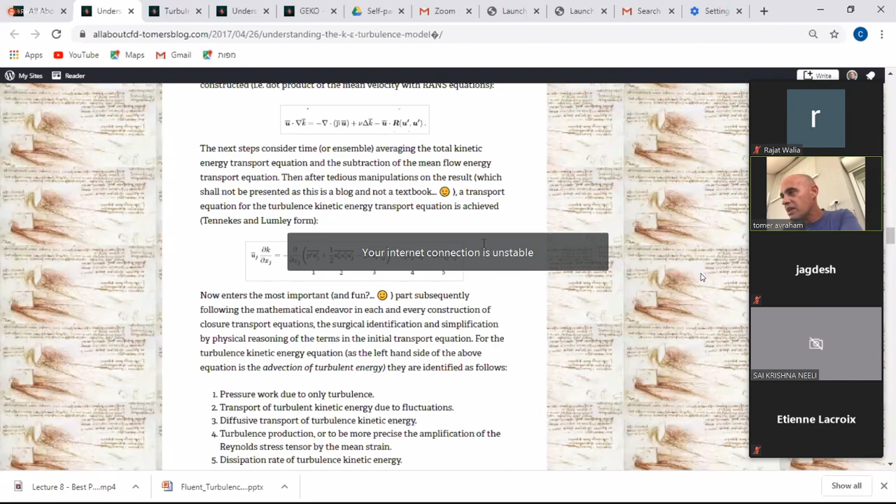Okay, so now I'm going to go back to All About CFD and under the objects that you saw there. Here is the triple correlation.

Each of them has a job. One of them is pressure due only to turbulence. One of them is the transport of turbulent energy due to fluctuations, the diffusive transport of kinetic energy. This is an exact equation.

By this point, we haven't made any ad hoc assumption, but now we're going to make some. The ad hoc assumptions are such that we're going to have an equation in the end which doesn't have in it any perturbative velocity.

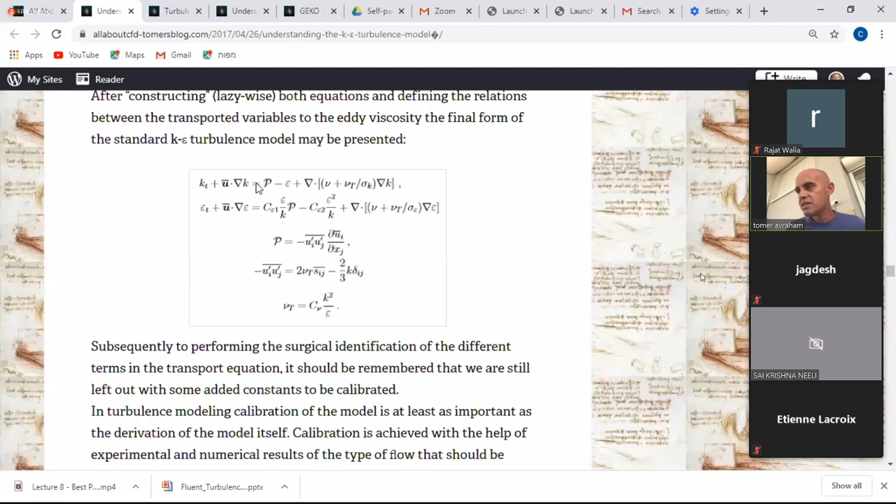So these ad hoc assumptions are kind of an issue. I mean, we already model all the turbulence. And not only that, we don't even solve the exact equations of the modeled equations.

But lucky for us, RANS has proven itself very good for flows which are binding to the law of the wall, which we're going to see again in a few minutes.

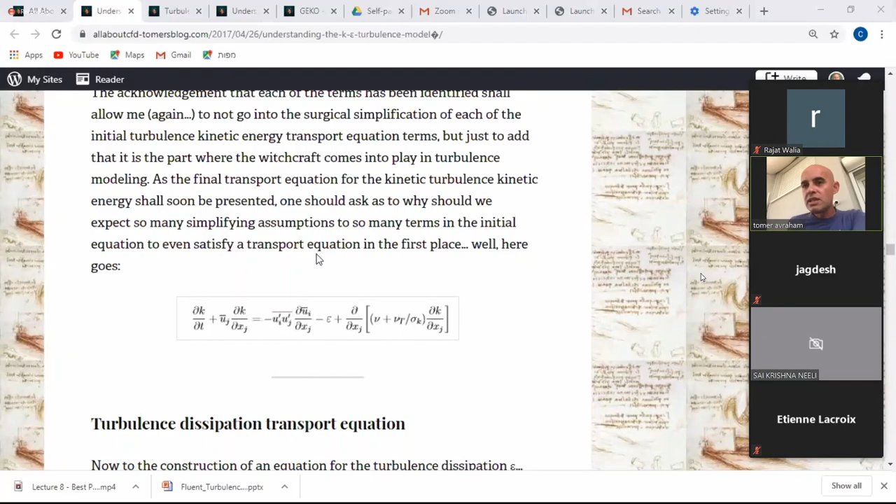And then there's the epsilon equation. Now, we can derive the epsilon equation the same way we derive the K equation, the turbulent kinetic energy equation, but it's quite cumbersome. So what we do, and it's an issue.

It's an issue, it's not like it's something we need to say doesn't matter—it does matter. We do an analogy. We take a production term, a destruction term, a diffusion term, and we handle the fact that we don't know epsilon by combining some connection with these constants here that you see.

These constants are empirical, that we're going to get from experiments, from DNS maybe. So we have an analogous equation which looks like the ad hoc equation for the kinetic energy, but for epsilon. We can do the same for omega, and for any length scale that we want to add.

I mean, the kinetic energy is like a feature of the velocity, and we need a length scale, and then the equations are closed because we can derive an eddy viscosity and solve at least for the average flow in the Navier-Stokes equation.

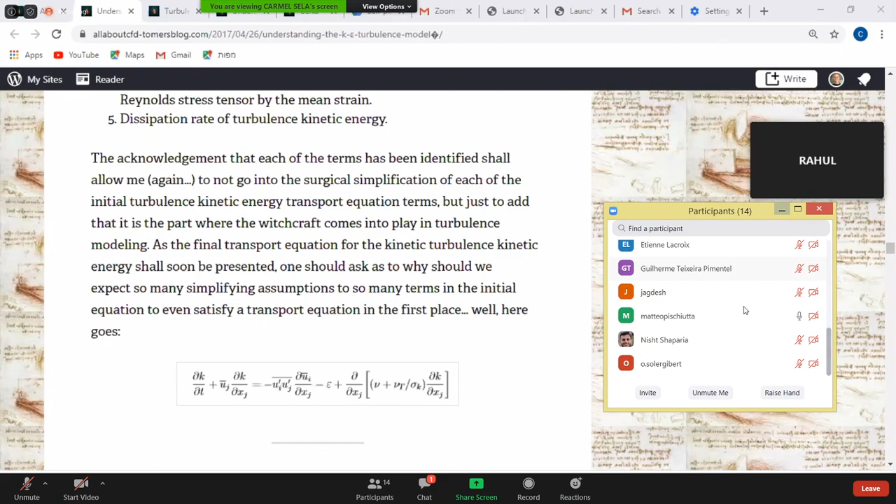Okay, so what you see here is the standard K-epsilon model. You don't see the correlation.

All these constants are not to be played with. You open Fluent and you see these constants, you can touch them, but then the K-epsilon or K-omega or whatever equations aren't going to follow the law of the wall, and frankly, they won't be calibrated, and you're going to get nonsense.

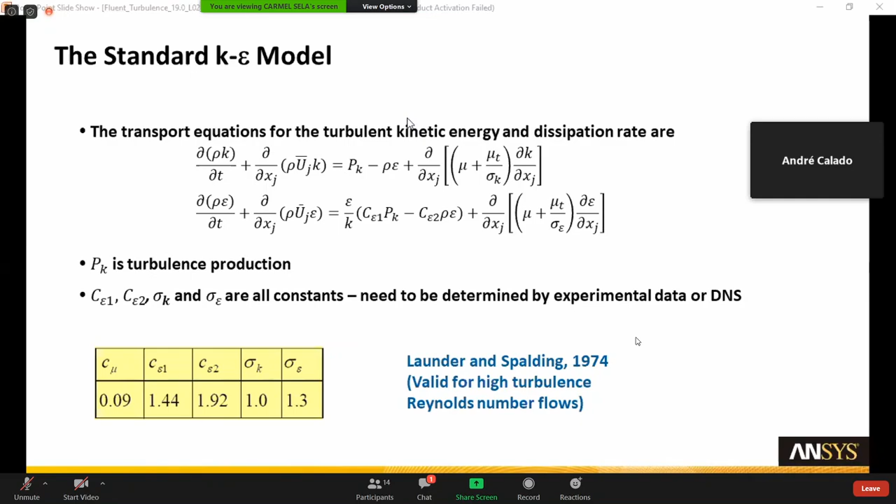Now we're turning into a little bit of history about K-omega. The original K-omega, let me share the screen again. Pause, share the screen, yeah, yeah.

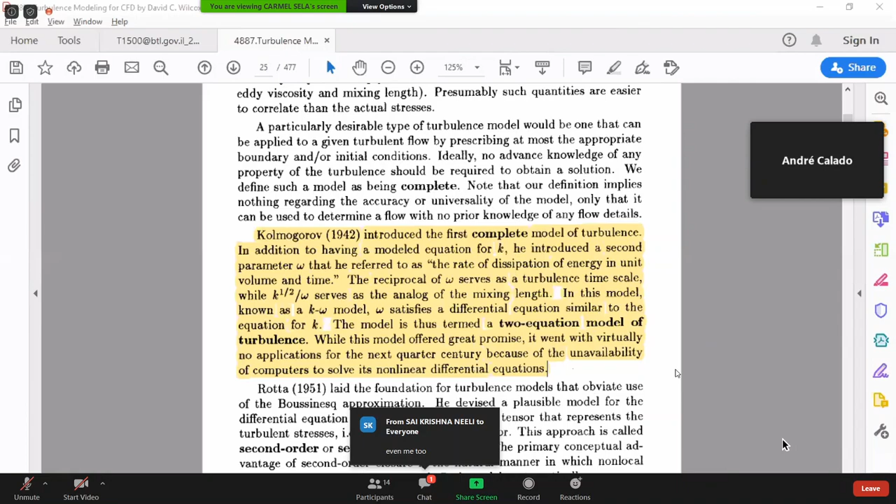The original and first K-omega was introduced in 1942, and it is the first complete model for turbulence. You probably understand what 'complete' means. Complete means we have the length scale and we have a velocity scale. We can produce it.

One second. Yes, actually we are hearing a big sound. Can you check that one? Hearing the big things. I'm not sure it's for me. Yeah, still hearing that. It's not from my room.

Okay, let's mute everybody. Sit down. Yeah, now it's fine. Lady? Why did... sit down, sit down, sit down, sit down, sit down, sit, lady, sit. Okay, sit down, sit down. Yeah, now that beeping sound was gone.

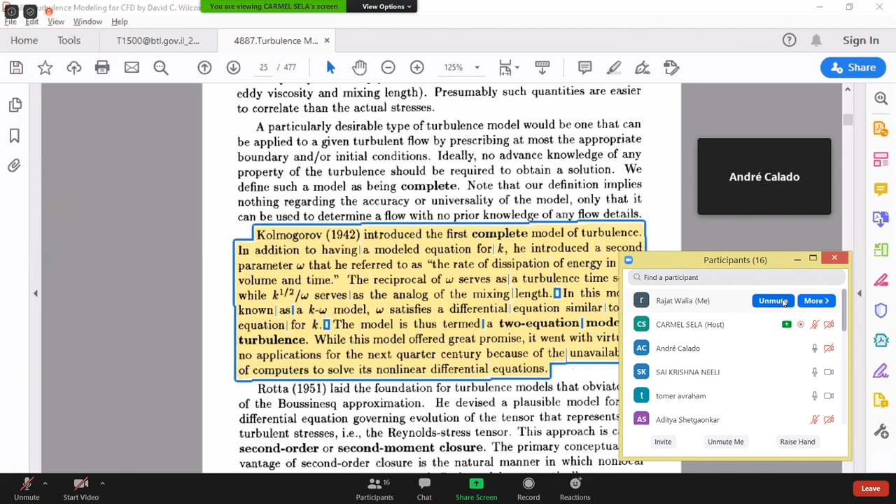Beeping is back. Yes, so someone is beeping. I'm muted. Now again, it's okay, yeah it's okay. Whom do you have muted? Someone has an alarm clock. Maybe probably they wanted it to wake them up for... but couldn't. Okay, so let's continue, and let's continue fiercely.

So the first complete model - by complete I mean it has two equations. We have zero equation models, we have one equation models which is more for kinetic energy. We have special one equation models like Spalart-Allmaras, which is a one equation model but it's a closed one, a complete one, because it has the transport equation for the eddy viscosity. And then there are the most useful ones: Spalart-Allmaras is mostly for aerodynamic flows, and the K-epsilon, the K-omega, and all the rest of them.

The first one was introduced by Kolmogorov, and it's quite amazing - he did most of his work really disconnected from the West. The model was a model as a model should be, as I would write it on paper, but it wasn't codable. It had never been tested, and it wouldn't have worked. There was no way to solve such nonlinearities at that time.

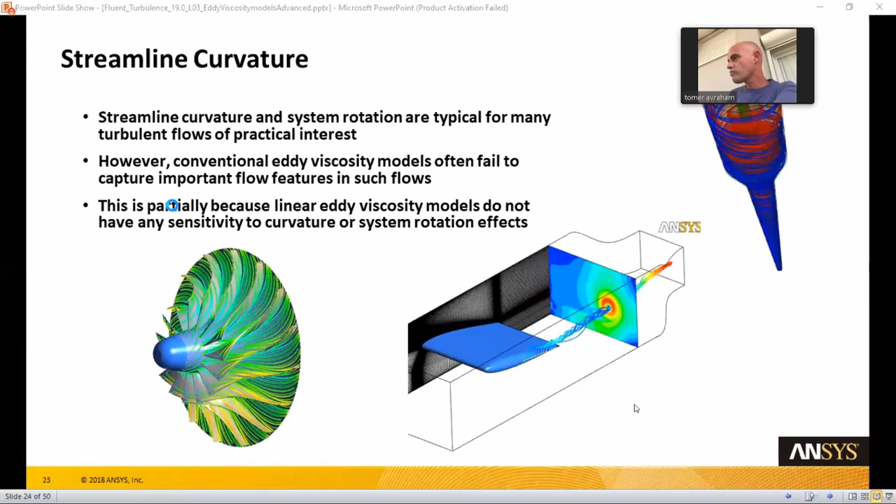Now we're going to go to the slide share. Share. Okay. Let's start talking about...

K-omega models. What we're going to talk about today is advanced two equation models. I told you about the history of K-omega - it started with Kolmogorov, beginning of the 40s. Just imagine that Launder and Jones had their model in 1974. The K-epsilon had come even before, from Spalding.

So in about 1982, David Wilcox derived K-omega. The K-epsilon had some obvious problems, most of them related to the inability to integrate through the viscous sublayer - it's wall sensitive, and this caused a lot of problems. So Wilcox devised a model which actually avoids the problem of wall sensitivity.

And you can derive the omega model exactly like you derive the epsilon model - derive the turbulent kinetic energy equation, then use an analogy and some constants that you afterwards check by experiments or DNS, and derive an equation for omega. That's the Wilcox model.

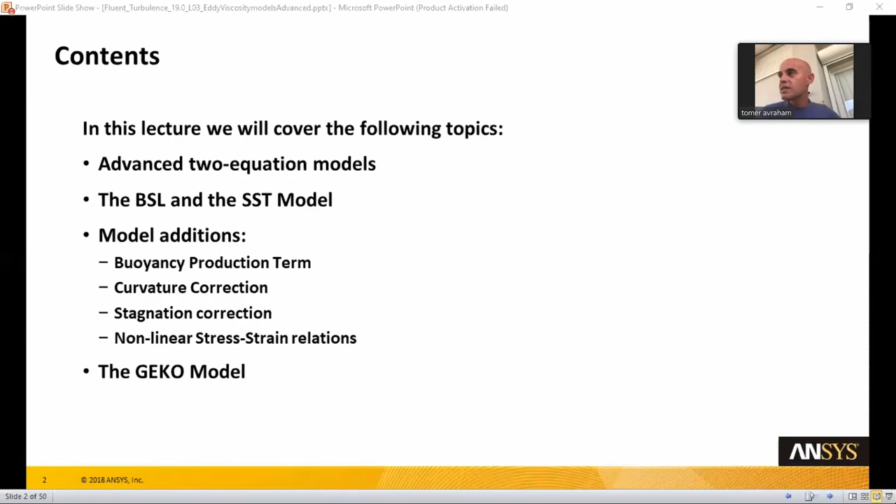So while at NASA Ames, he devised a model called the baseline model, and it was purely based on engineering thought. Why don't we combine the two models, the K-epsilon near the wall and the K-omega away from the wall? But actually the other way around: the K-omega near the wall, where there's no sensitivity, and the K-epsilon away from the wall.

You can see here the K-epsilon is very stiff near the wall. You can't integrate the epsilon equation to the viscous sublayer. So you either have to use wall functions, or as we'll discuss in near wall treatment, you'll see how problematic it is. Or you have to use a low Reynolds model, which means very nonlinear damping functions and problems with convergence.

On the other hand, the K-omega of Wilcox is very good at the wall. It even has what's called an elliptic nature - it communicates with the wall. In the logarithmic layer, both models are pretty accurate. And in the wake region, there's the free stream problem of omega's sensitivity to inlet conditions.

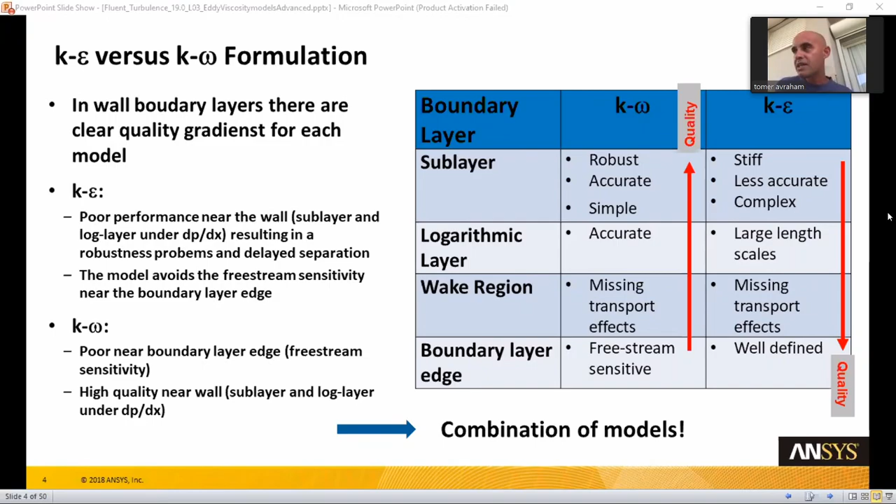So Menter said, why don't we combine the two? Of course it can't be a combination that's sharply defined, and we don't want to solve two equations, one for K-epsilon and one for K-omega. So what we do is use the Wilcox K-omega near the wall and a K-epsilon model which is transformed into a K-omega model away from the wall.

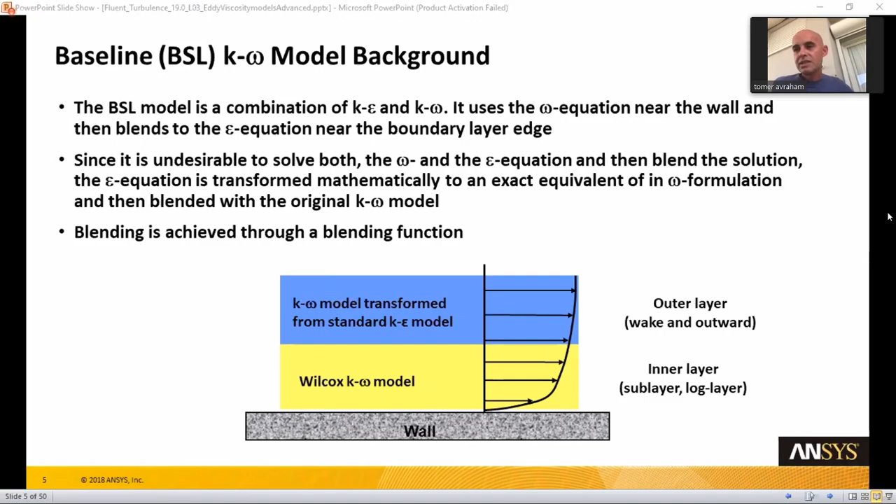So the K-omega, as I said, as we can derive it like we derive the epsilon equation, is the Wilcox equation. When we take the epsilon - there's a connection between omega and epsilon.

Do you see these messages that I get? Or no?

Many messages. Okay, there's a connection between omega and epsilon. You can easily derive an equation for epsilon by means of omega, and you get an additional term. What's so wonderful about this additional term? Near the wall it has almost no effect - it's actually a cross diffusion term. But near the edge of the boundary layer, it prevents the arbitrary conditions that the omega equation gets from the inlet. So problem solved - problem almost solved.

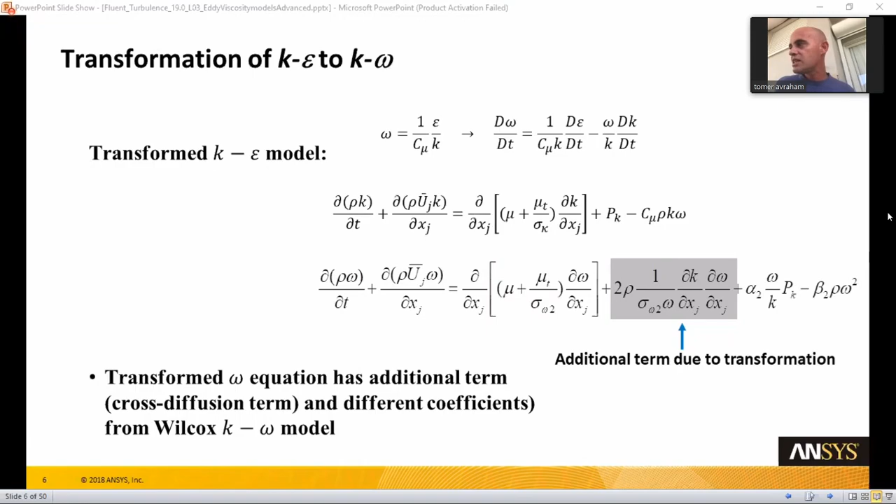The thing is, the blending has to happen so that now we have one equation - the equation is for K-omega. And we have something that Menter does a lot, which he will do again in the SST model, the transition model, and every model he has: using blending functions to blend between the two and arrive at a model which is the baseline K-omega model.

So most of you would say yes, the shear stress transport is K-epsilon away from the wall and K-omega near the wall. No - that's the BSL model. So we have a new BSL model, and the constants are a little bit different. We have a little disadvantage.

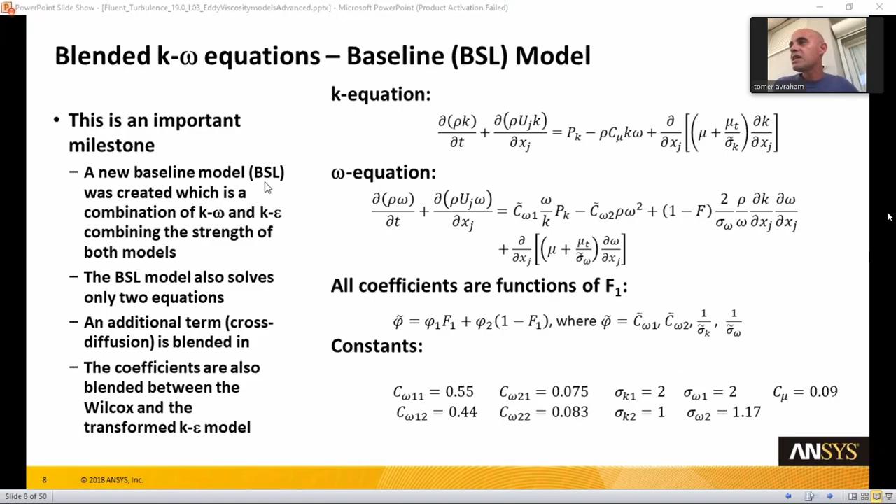Now we have the F1, which requires additional calculations. It's a linear calculation, but it's still a little bit slower than solving something like a realizable K-epsilon. But with modern computers, most practical problems don't feel these kinds of issues. So that's the additional thing.

The blending function itself is always very sophisticated and always has something secret in it. But you could probably say that the switch happens in the logarithmic layer, mainly in the middle of the boundary layer.

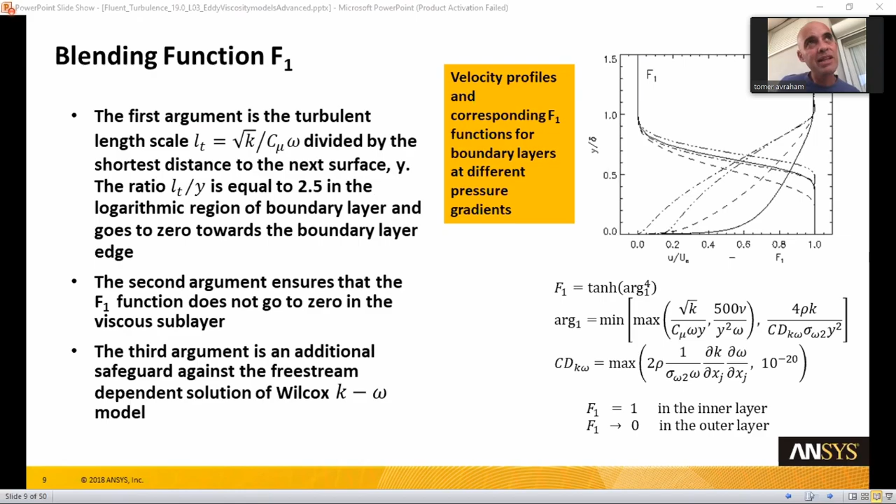Okay, now the shear stress transport - what is it? What we've noticed, in honor of Bradshaw's observation, is that the shear stress in the boundary layer is proportional to the kinetic energy. Turbulence implied by standard two-equation models looks quite the same - actually exactly the same, but multiplied by the square root of the ratio of production of kinetic energy to its dissipation.

Usually for equilibrium flows this ratio is 1. But near separation, for non-equilibrium flows which is an issue, or in cases which was a problem of the K-epsilon, it used to predict delayed separation. We saw that this value of production to dissipation could be very, very high. So what we did was put a limiter on the value, which is 10.

You can send... and we clip it, and then essentially we have a model which produces the effect of no delayed separation - which was a problem with the K-epsilon and is still a problem with the BSL.

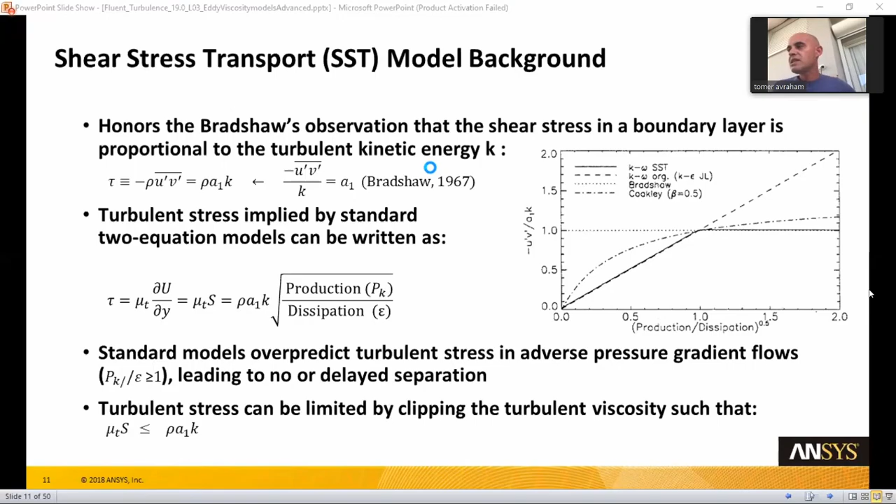But in non-equilibrium flows, the production could be very big, especially near stagnation points or separation points where the shear stress goes to zero, and then problem comes.

Limiter for the mu-t, that's less interesting here.

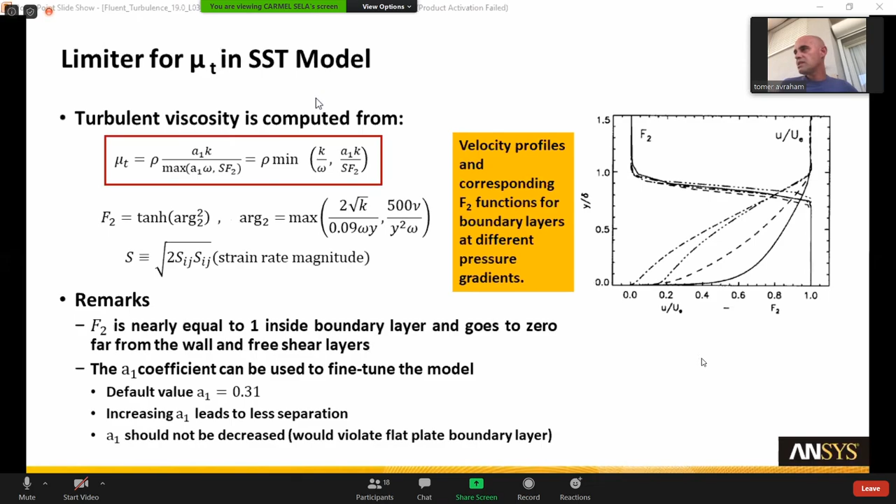The diffuser example shows how the K-epsilon model doesn't predict separation at all, while the SST model predicts separation. That's a kind of validation example—it's a fix to prove the point. But again, you should consider it carefully.

I'll say a few words about when to choose models like the K-epsilon realizable, and not just make the K-omega SST your default, although the ANSYS family makes sure that you do.

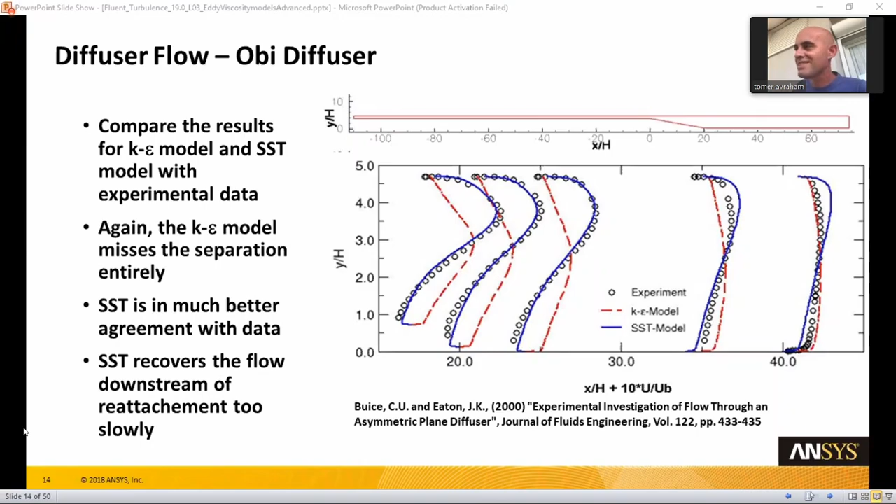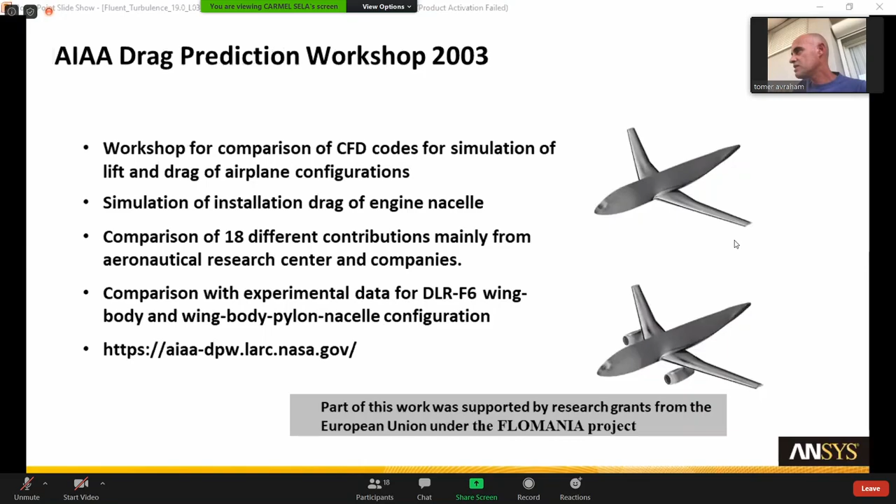So there are a little bit of examples here, some nice examples. Model additions, buoyancy term—for cases where buoyancy is really, really important.

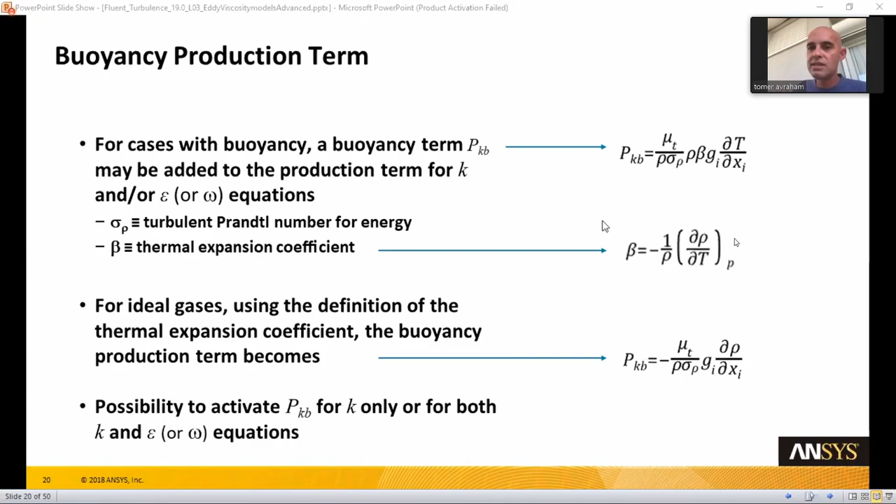Those of you who deal with it—is there anyone here who deals with highly buoyant flows? Then you should consider it. Do you have a remark about the subject? You can unmute yourself and ask.

Yeah, hi. I'm looking for fire simulation in subway stations, actually. So that's why the buoyancy term is quite important to get the correct smoke flow in the subway station.

And it's an interesting problem—my friend, my co-author at All About CFD, that's what he's dealing with. I don't know if you heard about him, but I still use Fluent, while the community more often uses FDS. He used FDS and LES. Yeah, I know, but for myself I still use Fluent. That's cool.

So I don't have much to say about it. I mean, probably you need to use it when you use it, right?

I use the full buoyancy effect from the K-epsilon, for all the terms. So here exactly is the full buoyancy effect—you can see it in Fluent.

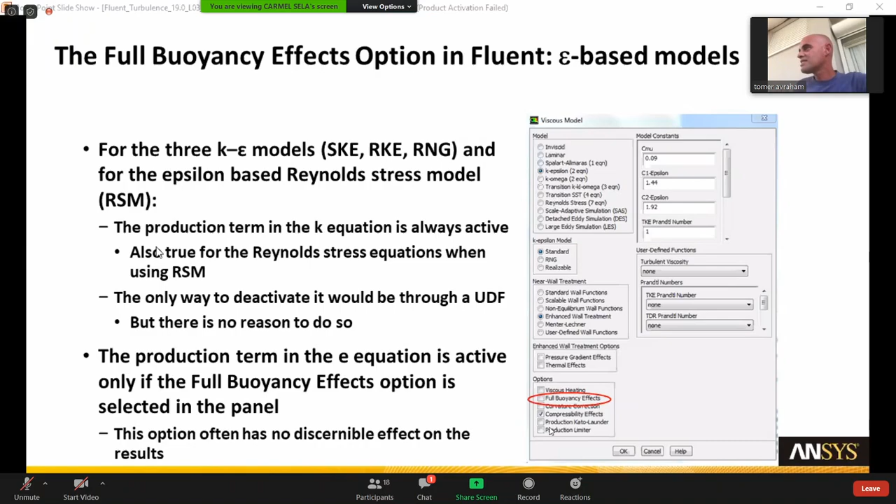Buoyancy effect for omega—you can also use this, but you said you use K-epsilon for solving such problems. Yeah, I still use the K-epsilon.

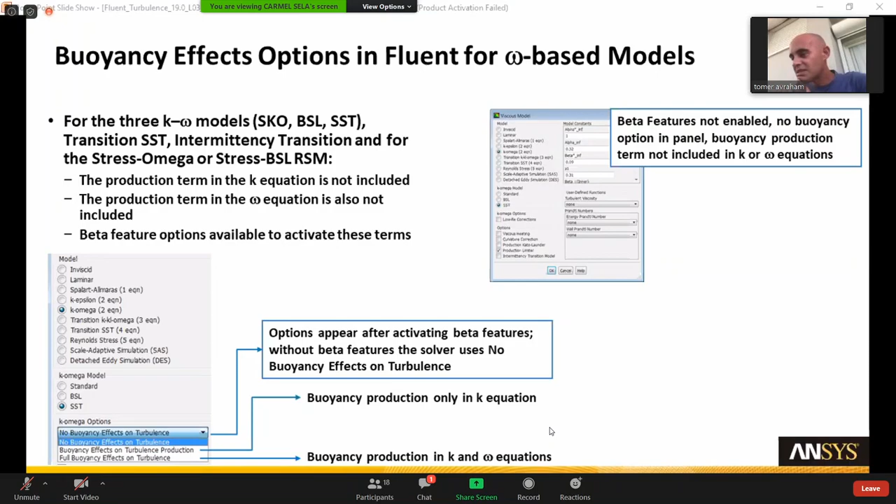A much more familiar problem that many have to confront is streamline curvature—the curvature correction. The results of a U-bend with or without the curvature correction are extremely different. Just to show you what it is based on.

What is it based on? I should share screen again. The correction is taken exactly from the Spalart-Allmaras model rotation correction, the Spalart-Shur correction.

If anyone wants to read about it, this model is like a work of art of tailoring a model. What they did is order the flows into two kinds: those with thin layers with weak rotations, and those with homogeneous rotating shear vortex cores with strong rotations, and they handled all of these.

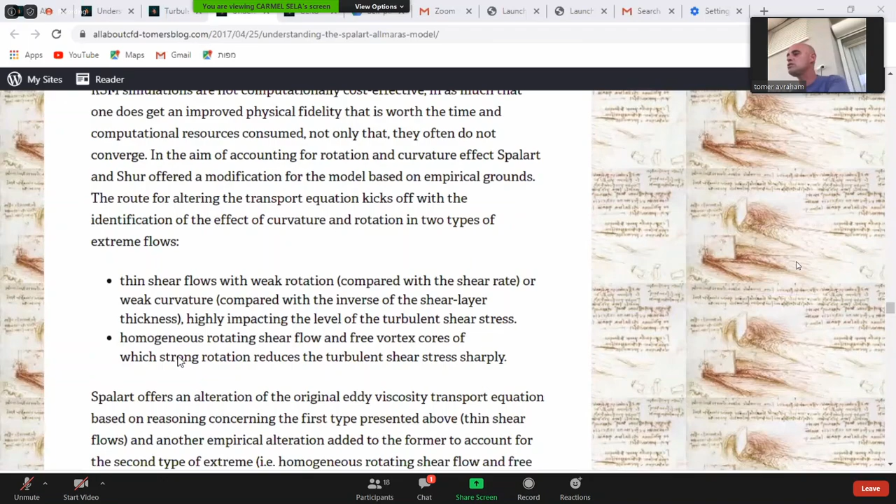Then Mentor just took it and used it for the curvature correction. So it's the same Spalart correction that you already know, but you should use it if you have swirling flow problems—it's going to make a difference.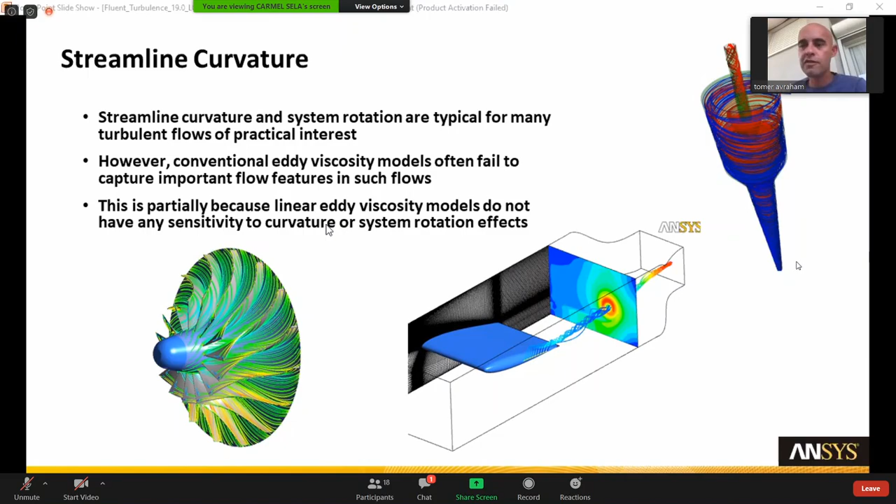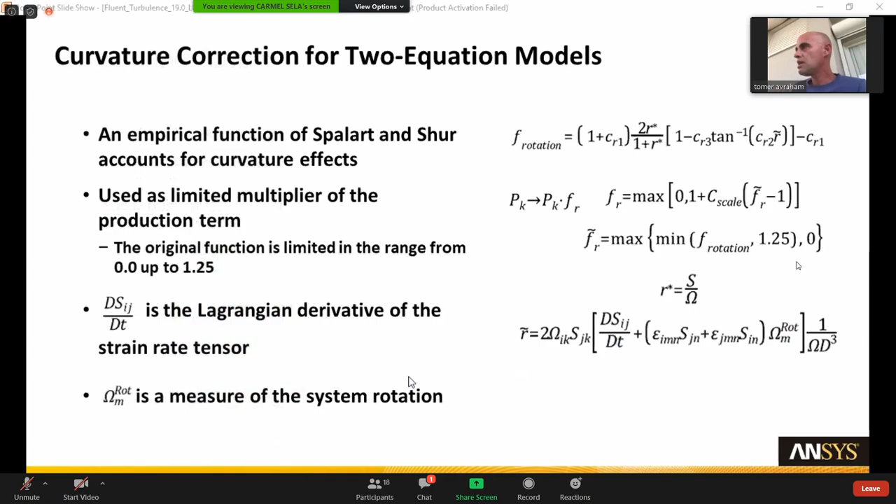Curvature correction for two equation models—we'll take the developed channel flow as an example.

What's really important to me is to talk about stagnation correction. Stagnation corrections are pretty important.

Here is a place where maybe the K-omega SST might not be the best choice. If you have a flow with many stagnation regions which are important—maybe for an incompressible flow problem it impacts all of the domain, but maybe not in such a big way. But if it is important, then there's the Kato-Launder modification.

What the Kato-Launder modification does is use, for the production of kinetic energy, the dynamic eddy viscosity times the shear strain rate S instead. You know what S is—everybody knows what S is, right? That's the shear strain rate; it depends upon the average velocity gradient tensor, half times that.

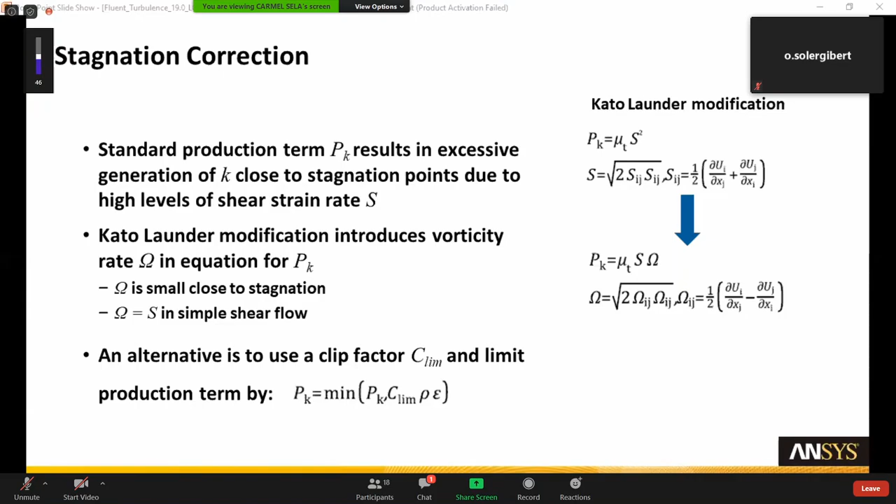Any more questions about the K-omega, K-omega SST, K-omega baseline model? We're not going to touch the transition model, I think it's too much for today.

It's my favorite topic. Sorry, Tomer, I have just one last question. You mentioned that you do not recommend to use the...

SST as Fluent changed it in the new version. I mean, I do recommend using it as a default model most of the time, but that doesn't mean it's all inclusive and does everything better than any other model. I can show you at least 10 problems where the realizable K-epsilon, with different calibration constants, gave better answers.

Or when the BSL gave better answers than the K-omega SST. So it's not... you need to validate your results. You need to check a few turbulence models and see how they react.

There is also the EARSM. If you have corner flows, like a square tube, then you get these vortices where the walls connect, and two equation models can't solve these at all.

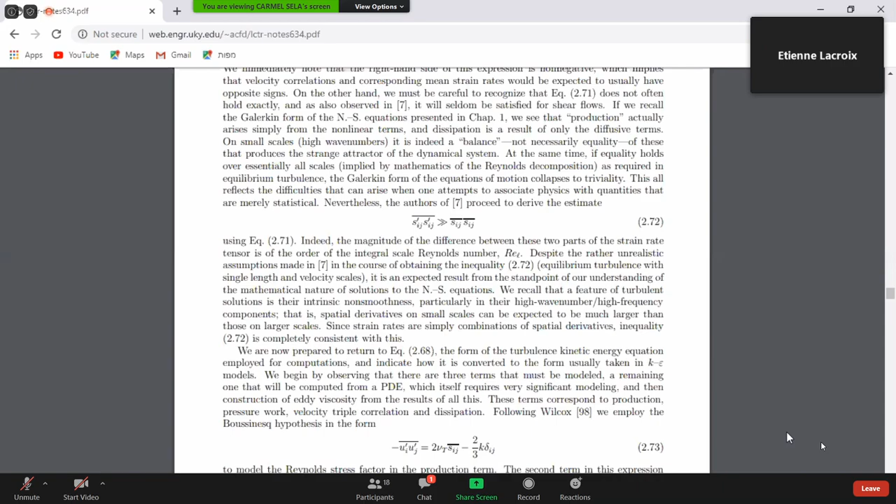Okay, thank you. So that's the other part, the near wall modeling, which I'm sure everybody admits is important.

It's not this page. I lost myself. So, okay.

Near wall modeling. Let's share the screen. So now we're going to go a little bit back to basics, because some of you might be shocked to see the law of the wall in front of you right now. Some of you might not.

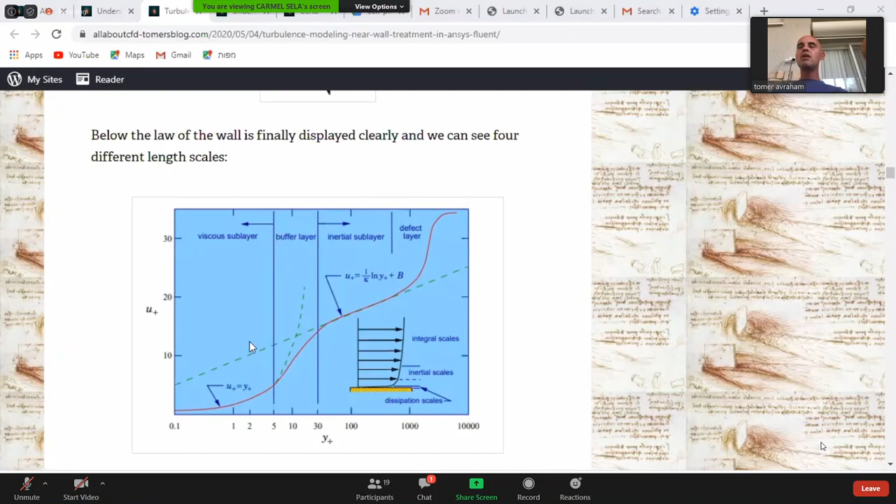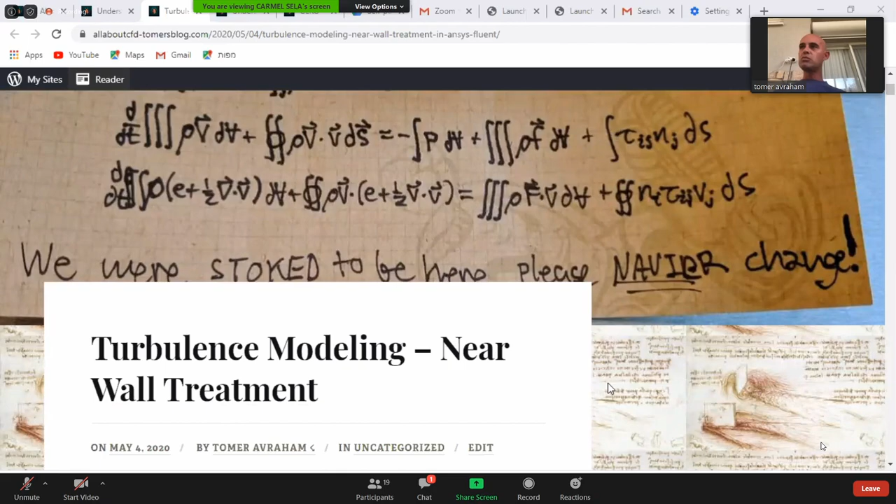If anyone doesn't know the law of the wall, this specific post is the turbulence near wall treatment, and it has a full derivation of the law of the wall, so you can understand what the law of the wall means.

Generally, the turbulent boundary layer separates into a few regions. These regions are not connected directly. You should actually use perturbation theory to find an accurate match. But there's the viscous sublayer, or the laminar sublayer, which is linear.

Remember, we have a logarithmic layer here. These are Y+, they are wall units. This is U+ equals Y+. So till Y+ equals 5, it's the viscous sublayer.

It's kind of a laminar sublayer, and when you use a low Reynolds model, you need to have, or when you want to check for drag or get some heat transfer results which are very, very accurate, you would need to have Y+ 1 anyway. It doesn't matter if you decide to use a low Reynolds model, with its own deficiencies of Van Driest's nonlinear terms and stuff like that, or you use K-omega. You still need the resolution inside Y+ 1, and probably even less, because you want to hit it.

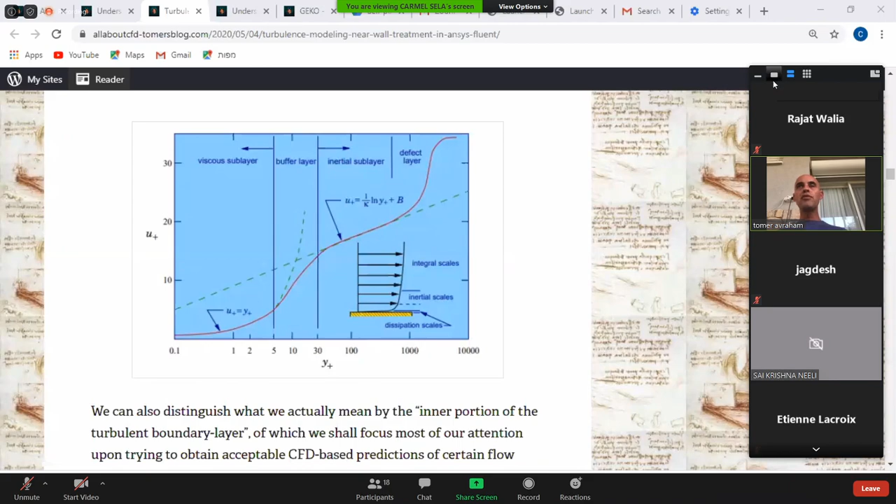So using wall functions is usually when you have a high Reynolds problem, not when you have turbomachinery problems, or... nothing comes up to mind right now. But you should be very careful.

Okay, so you should have the right resolution, which means that the boundary layer should be covered, according to Florian Menter, not me, by at least 15 layers of mesh, prismatic mesh, of course, because we don't want to have numerical dissipation issues. We want the mesh to be aligned with the normal to the prism, right?

That's why we build the inflation layers. 15, and sometimes in problems of aerodynamics, it even gets to 40 or 50.

Remember that for high Reynolds number, the end of the log layer could be about 5,000, 10,000. Low Reynolds number problems like turbomachinery, or other kinds of low Reynolds problems, like non-Newtonian simulation you're doing on blood flow or something like that.

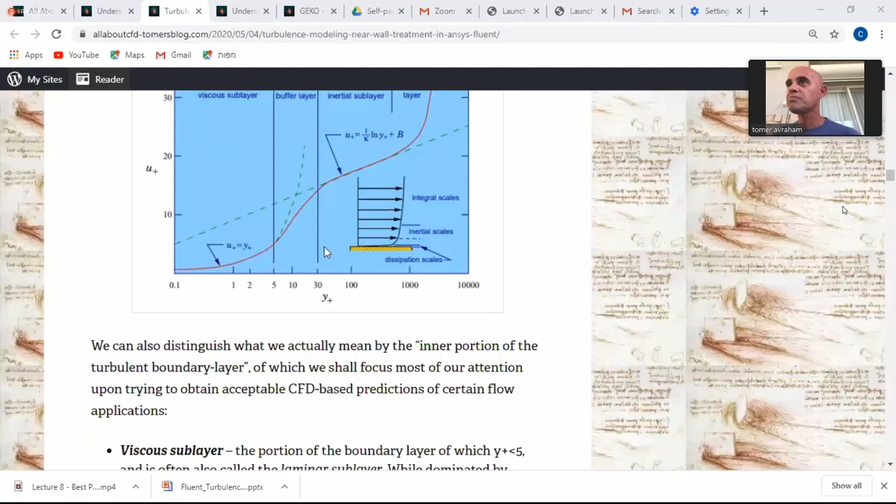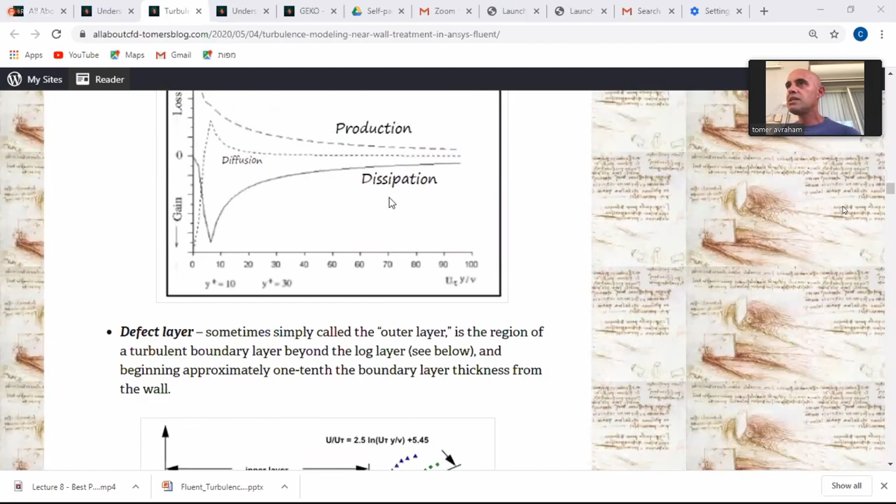So we explained about the viscous sublayer, the buffer layer, the inertial log layer, the defect layer. There's a calculator here to calculate your y plus from the physical units that you actually need to put.

I mean, your y plus 1 could be like 6 microns for an airplane, or use Pointwise as a calculator. It's faster. It's pretty cool.

So near wall modeling is probably the most important thing in turbulence. It's also the reason why we cannot still use LES as an engineering tool. You probably see a lot of LES in the combustion fields, because the action is away from the walls. But when we get near the walls, 95% of the mesh is concentrated near the walls, and the cells cannot be stretched, due to the size of the Kolmogorov scale.

And according to Philip Spalart, we're not going to be able to solve a problem of a full airplane with large eddy simulation till 2070. But we wouldn't have any turbulence if we wouldn't have any wall.

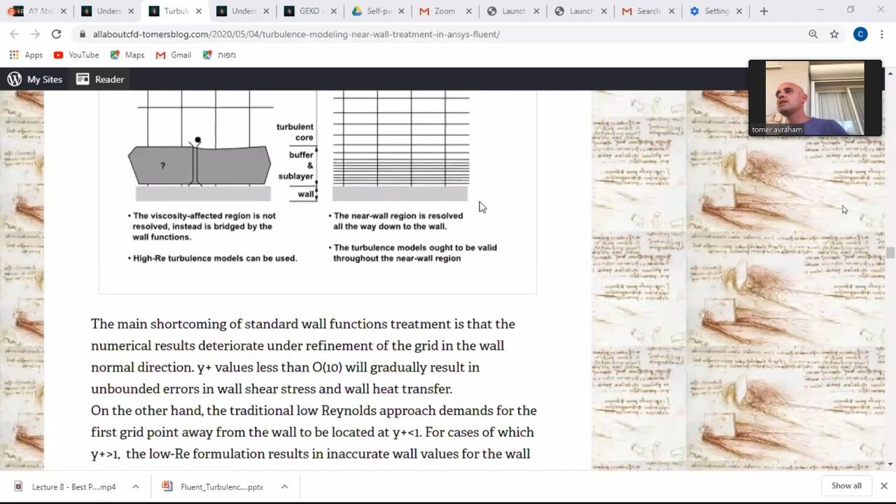There are a few ways to do both the wall function and the near wall model approach. I'm going to talk about Fluent, assuming most of you are using Fluent, but I wanted you to know that I'm a distributor of Star CCM, so it's my preference that you move from Fluent to Star CCM. I think you could derive better stuff from there.

In Fluent, we use the Y star. Does anybody know why we use the Y star? Because you don't have to solve a non-linear iteration problem to calculate it. More exactly, because when we get to separation, the shear at the wall goes to 0, and then the friction velocity, which is dependent upon the shear wall, goes to 0, and then you have some kind of problem which breaks down, kind of.

And do you know when you have zero stress at the wall? At separation, of course. So you have a separation point and an inflection point above it, and it can't calculate it. So they used a different calculation, which is simply avoiding this predicament.

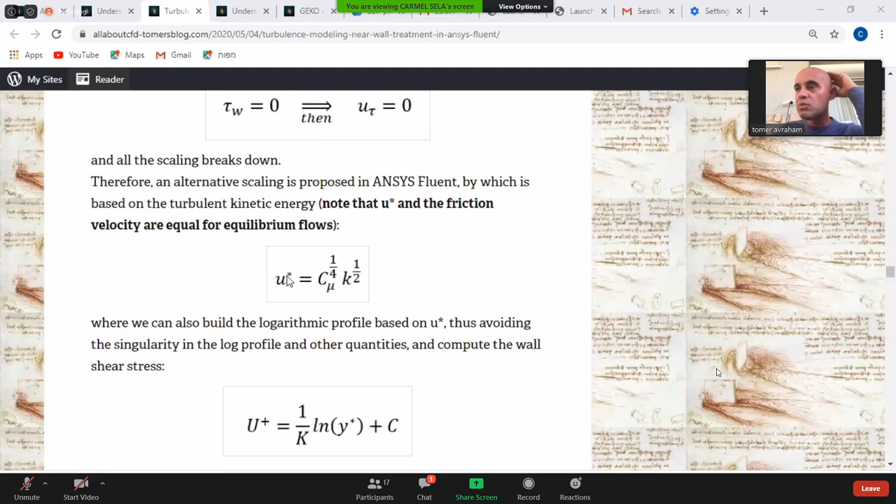Anyway, when there is a separation, the RANS model doesn't function anyway. It's erroneous to explore a separation region with RANS. Okay, so this is y star. So when we don't have a separation, there are exactly the same.

Is there any physical problem of engineering interest that doesn't involve separation? There is. Flow over a flat plate doesn't involve separation, as much as I know. Of course.

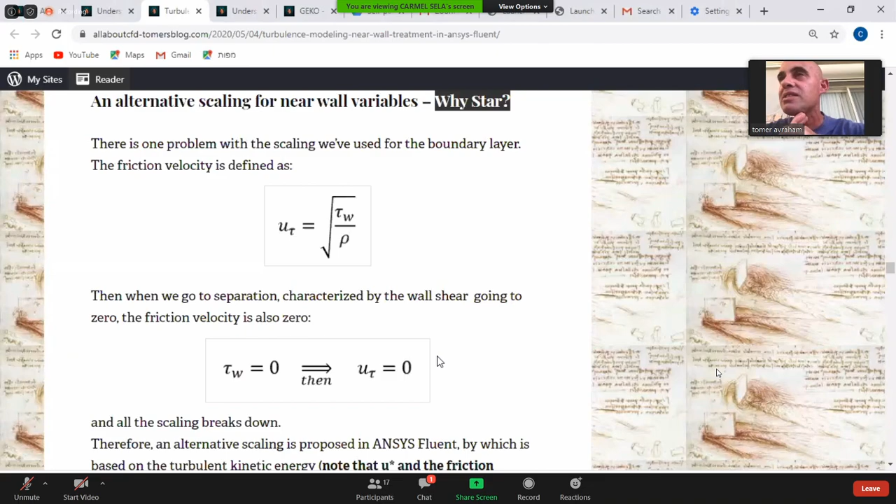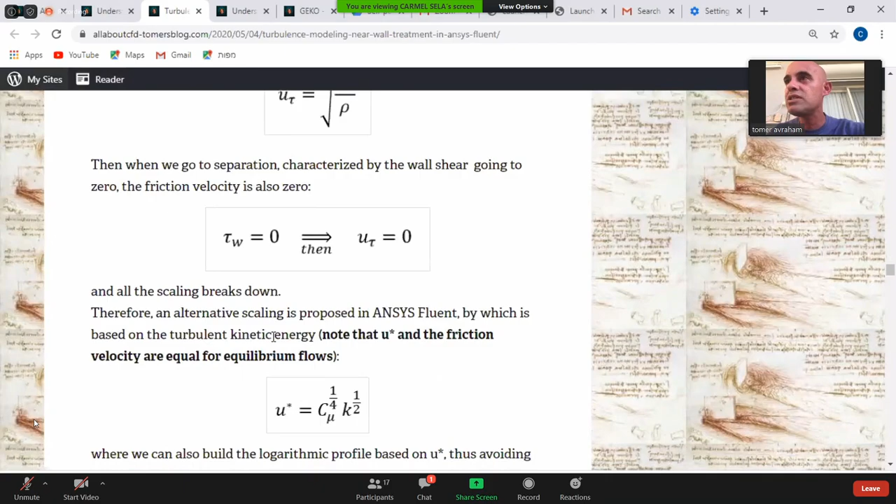Just when you have this issue of an inflection point in the velocity profile, then you might have a zero stress shear wall. Shear wall might be zero, and you have a separation, so you cannot calculate this friction velocity. So they made a switch to y star, which is kind of based on different notions, but looks exactly the same, except stuff that it's beyond your scope.

And Fluent employs this 11.225, below which a laminar stress-strain relationship is employed, and above that the log law is employed. So they cut the buffer layer. There is no buffer layer.

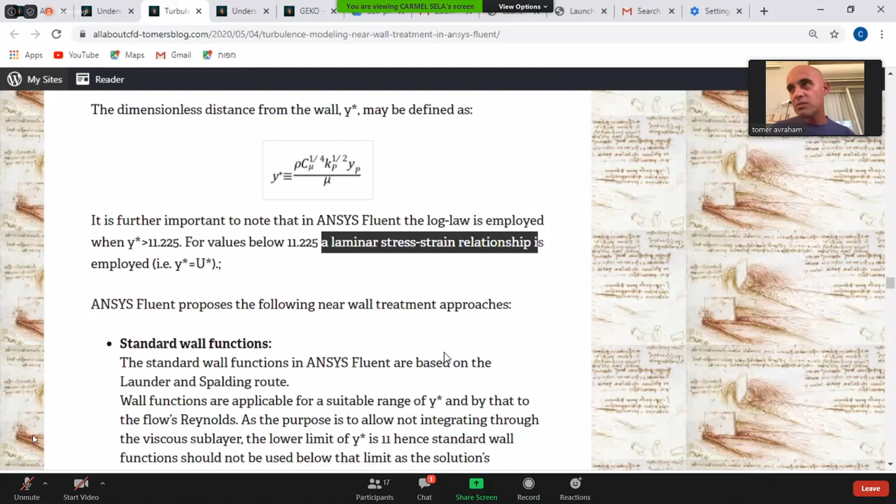Standard wall functions, we've spoken about it. From everything written here, there's another option for low Reynolds problems, UAVs, or even those tiny quadcopters. There you have a low Reynolds, and you might have problems getting the correct resolution of mesh inside the boundary layer. I'm going to show you in a moment how to check for the correct description of the boundary layer, but keep that in mind.

I have a question. Can I ask? Actually, y plus value we will calculate, right? To define the first cell size from the wall. And when we made a mesh using that value, and when we import that mesh to ANSYS Fluent, the y plus value we obtain in ANSYS Fluent will be quite different. Actually, I faced that issue. Do you ever face that?

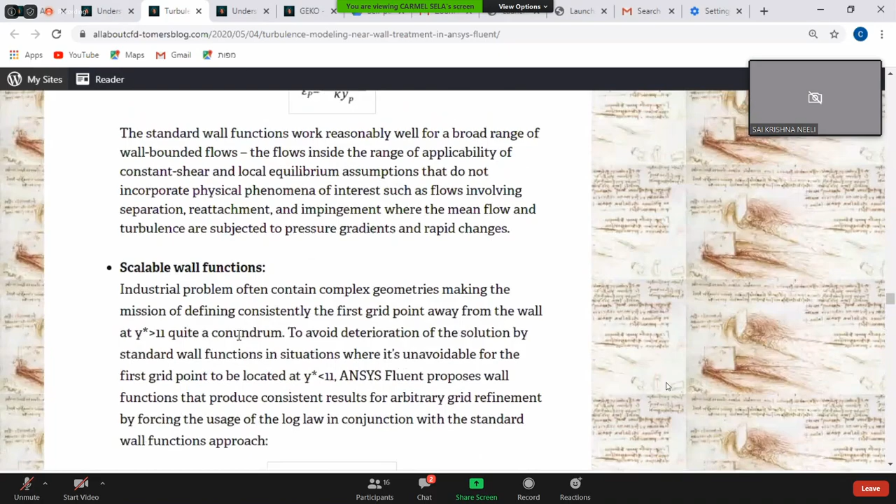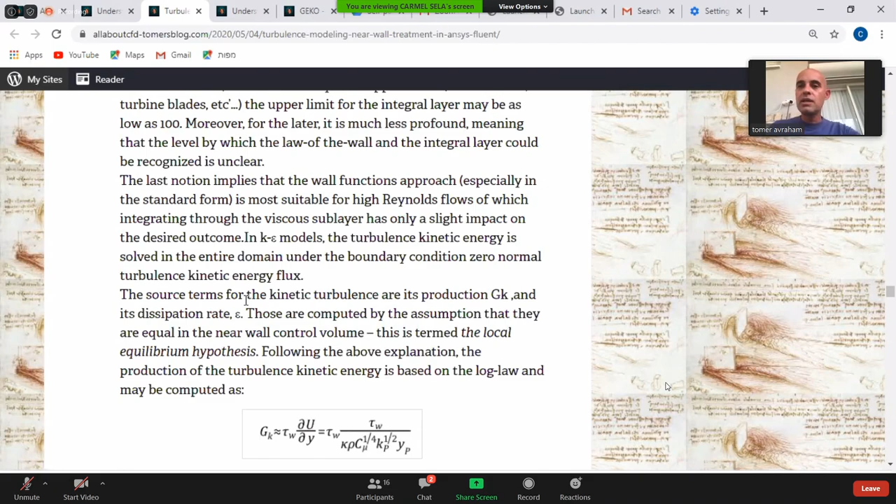Let's go through some of the kinds very fast. So wall functions - we said the thing with the low Reynolds and high Reynolds. Take that in mind: 15 layers and above. That's the ANSYS, that's the Menter recommendation. I know some even use in Rafael or in others, 40 or 30 layers as the minimum, and yes, they use clusters.

We have scalable wall functions. Sometimes the grid is located somewhere near the buffer layer, so to avoid that - and as you said, it changes along the wing, it changes along the body of what you're trying to manufacture - scalable wall functions scale it to be located everywhere at Y star above 11, let's say. So that's a good way to use scalable wall functions without being too much worried about resolution.

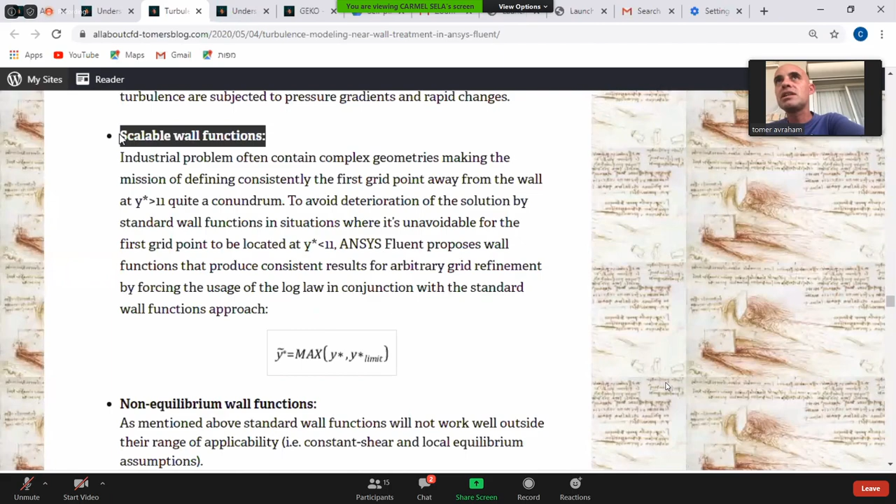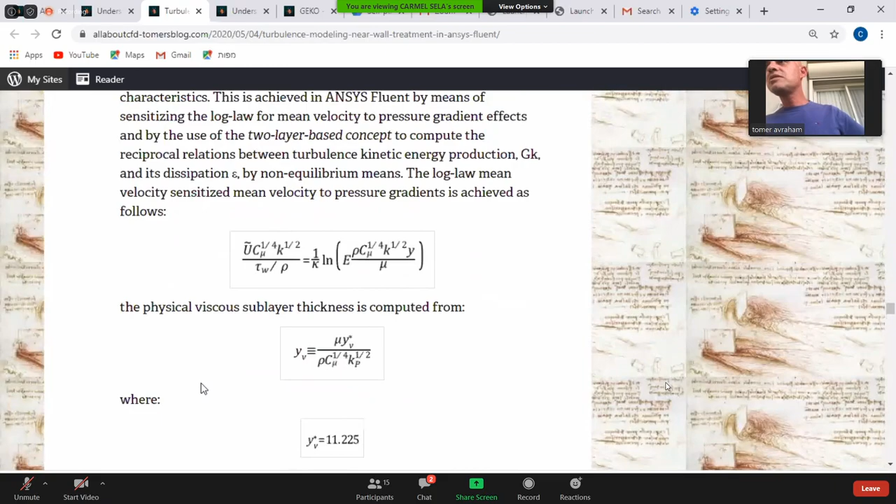Non-equilibrium wall functions - these are for cases where you have non-equilibrium flow, I don't know, jets, stuff like that, shear flows, and then you should use them. I usually don't use that.

Enhanced wall treatment, that's the EWT. This is used to resolve the viscous sublayer. This is the low Reynolds model that ANSYS uses.

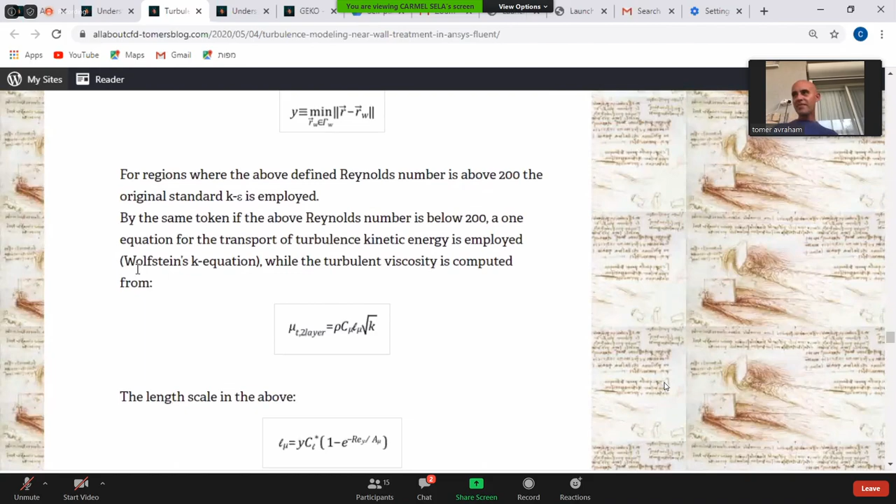It's what's called a two-layer model. For regions above 200, the original standard K-epsilon is employed. For regions where it's below 200 locally, not the low Reynolds, a one equation model is employed - that's very important, the Wolfstein equation.

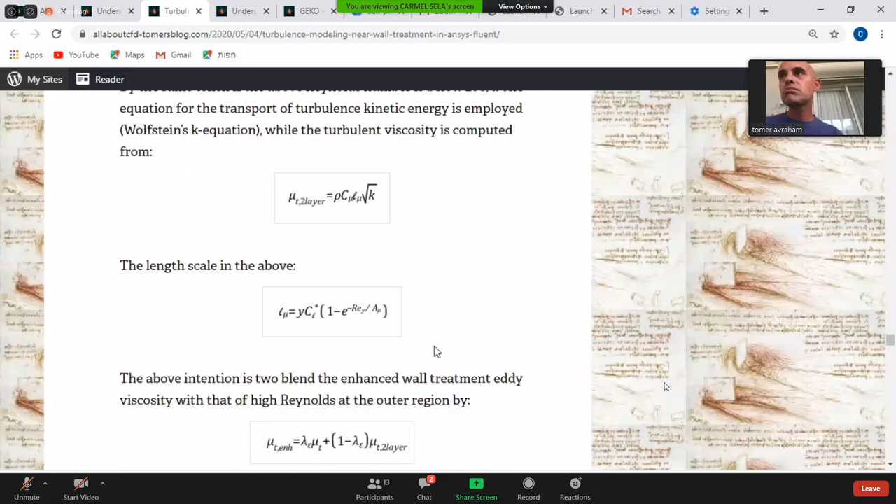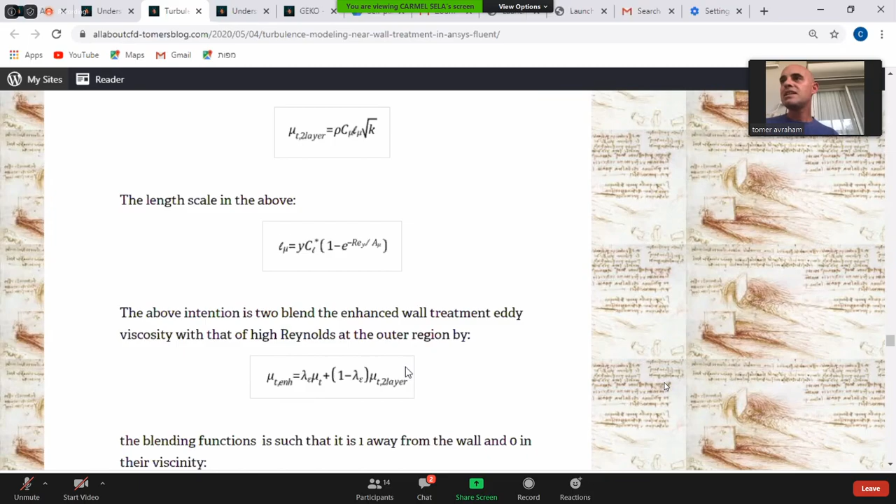So that's what you get with enhanced wall functions. This is where the K-omega SST might have lots of advantages that you're usually not aware of. The Menter-Lechner is essentially a two-layer model made to make K-epsilon insensitive to Y+. As long as you have sufficient resolution at the boundary layer, the Menter-Lechner will solve the model either by low Reynolds or the standard way with no problem. So no one uses it, but you can.

Any questions about that? I promised I'm going to show you the best way to estimate if your boundary layer is okay.

What most of you do is take the velocity profile and just look when it looks like free flow and when it drives back to the no-slip boundary condition. It's not good enough.

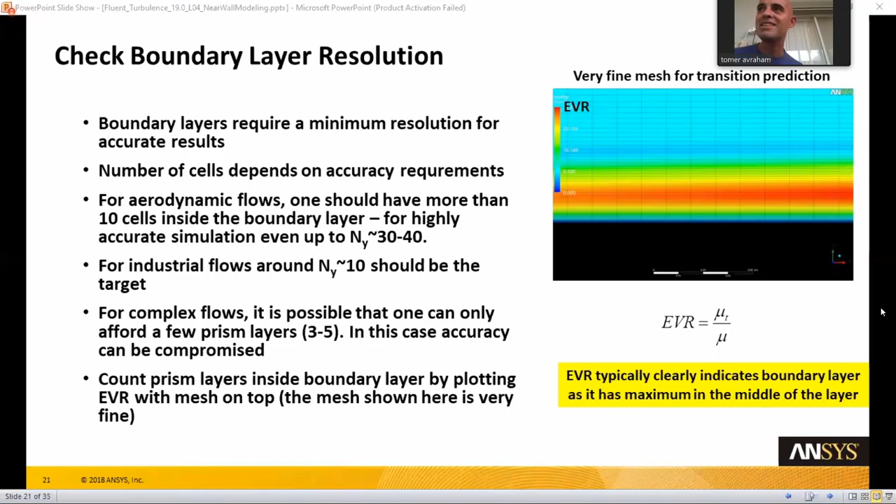That's understood, so you can send a mail, continue. Yeah, but remember me. Yeah, sure.

So you have in Fluent EVR, you can show it. But since you mostly use constant viscosity, I don't see what's the difference between that, and maybe the numbers would be more.

Sorry, Tomer, can I ask a question? What model is being used in these plots here? Do you know what model is used? What turbulence model is being used to generate these examples that we're looking at? Is it K-omega, or shouldn't it look very different between K-omega and K-epsilon?

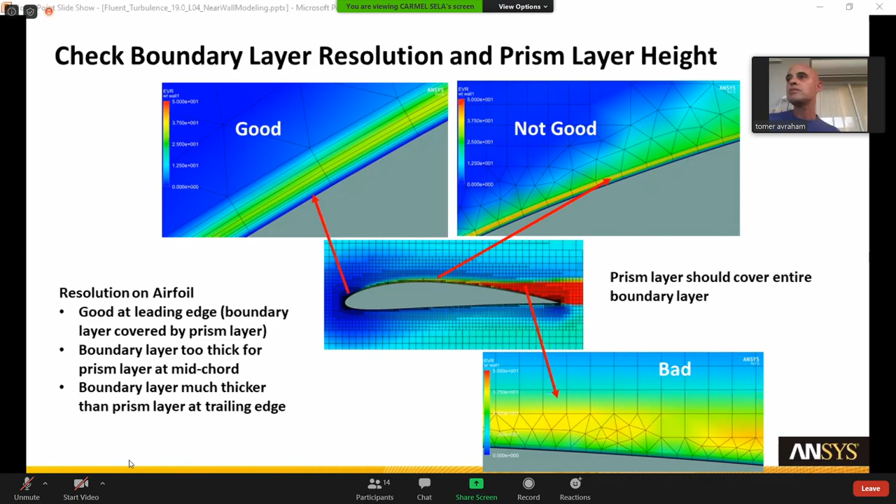Okay, GEKO, where are you? Where are you, GEKO? And then there were 6. I don't remember why the elephant was there.

But the generalized K-omega model with 4 parameters, I can—it's because of the John von Neumann quote: with 4 parameters I can fit an elephant, with 5 I can make him wiggle his trunk.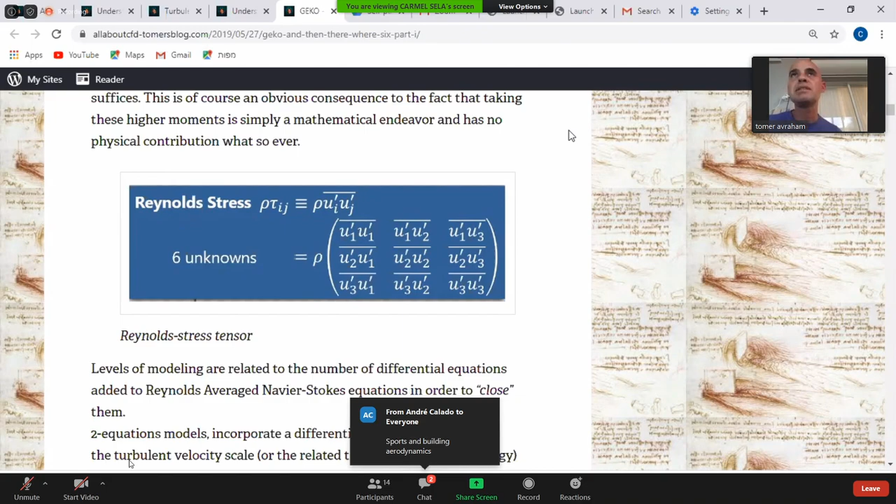So what we have is, remember when we talked about K-epsilon and K-omega, you have constants which need to be calibrated to match between K and epsilon. You have the C-mu, you have the C-alpha for the K-omega, you have the C-mu for the K-epsilon. These are calibrated according to the law of the wall. You can't really change them—well, you can change them, but then you're not binding to the law of the wall. What Menter did is add a few parameters which could be changed, actually without disturbing the adherence to the law of the wall of the original parameters. It doesn't mean you cannot do rubbish with them.

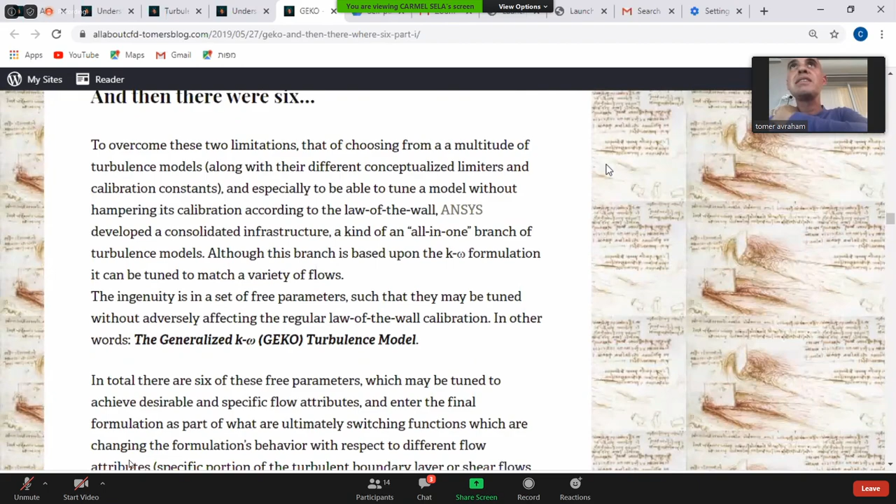That's the meaning of... I like to talk a lot about stuff that is not important. Then there were 6. Okay, so he added a few parameters—I don't call them constants, they are parameters.

Most important of them is C-separation. If you remember when we talked about K-epsilon and K-omega, and the delaying of separation in the K-omega, and the delaying of separation also in the BSL and the K-omega SST solving it—this free parameter is the main contributor to the aggressiveness in the prediction of flow separation.

Okay, so now you push GEKO, and then you have a parameter CSEP that you can adjust. I know the question will come—you don't have to ask it now, okay?

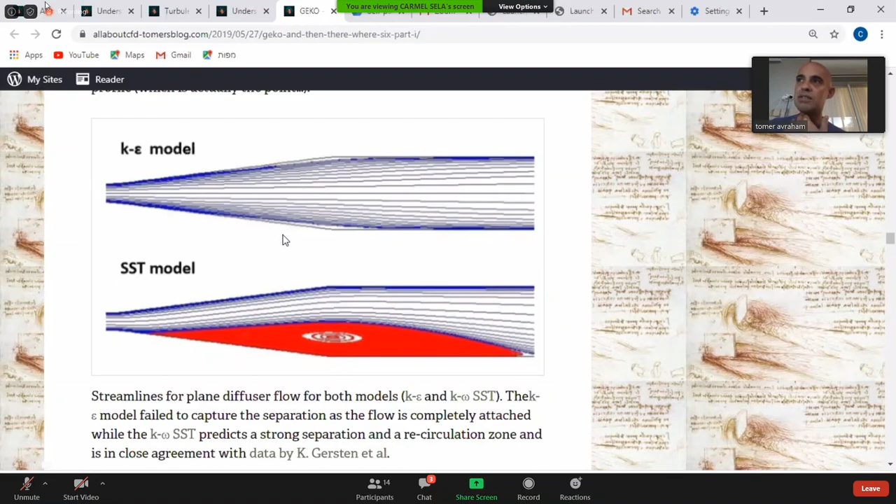You can see again the picture of the K-epsilon, SST model. You can have a set of parameters—6 parameters, we said—which can define the K-epsilon, and 6 other parameters which will define the K-omega SST. They won't be exactly the same; they are not exactly K-epsilon standard and SST model, but they are almost exactly for all intensive purposes. You see that you don't get separation in one, and you get delayed separation. The flow is attached. In the SST model, you get a separation.

The CNW is kind of a free parameter, of kind of low importance, and its intention is to limit the effect of the inner portion of the boundary layer on the shear stress, especially for non-equilibrium flows. You usually use that together with the CSEP. The two free parameters, CSEP and this one, are those in charge of the boundary layer.

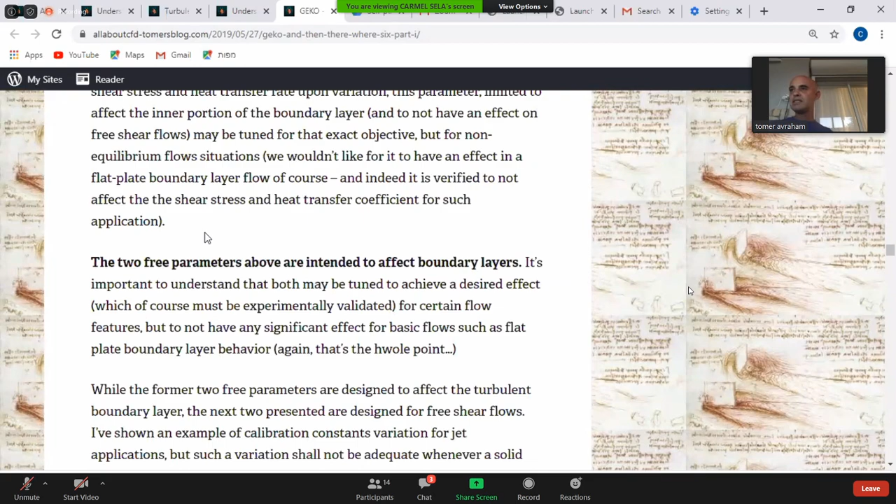CMix. Now we go to free shear flows. Reynolds-averaged Navier-Stokes have many problems with free shear flows. The calibration for most turbulence models is based on the law of the wall, and there are many problems with free shear flows, especially those with many turbulent content features, small eddies, big eddies. You can't really see that. So CMix is kind of a free parameter to ensure...

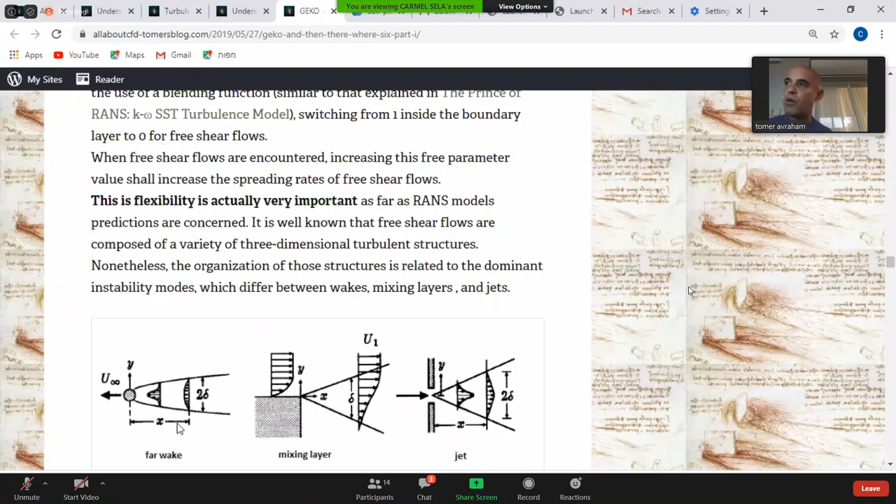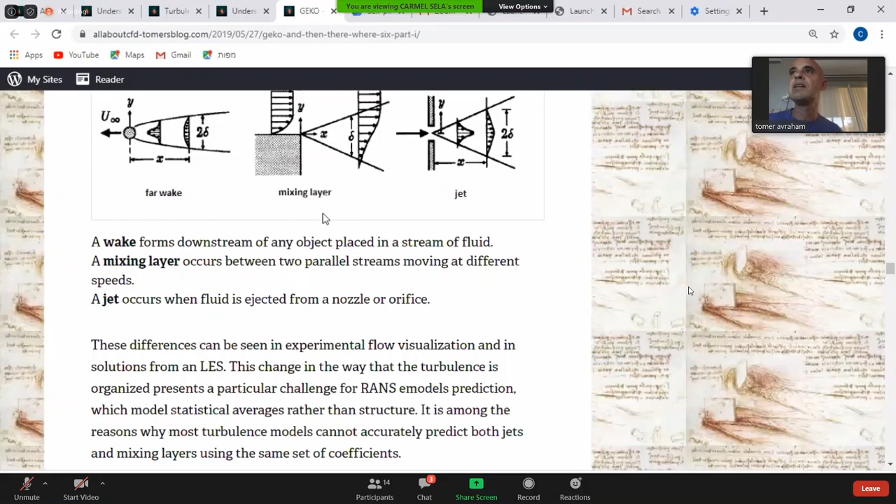You see a variety of free shear flows. CMix is kind of a free parameter—we're still in the domain of RANS, but we want to get something more consistent with what we would expect from a mixing layer, a far wake, or a jet. So that's a parameter which doesn't deal with the boundary layer; it deals with the wake or the jet, the outside of the boundary layer.

CJet is especially for these kinds of flows. It's some kind of derivative—it has a less stronger impact than CMix.

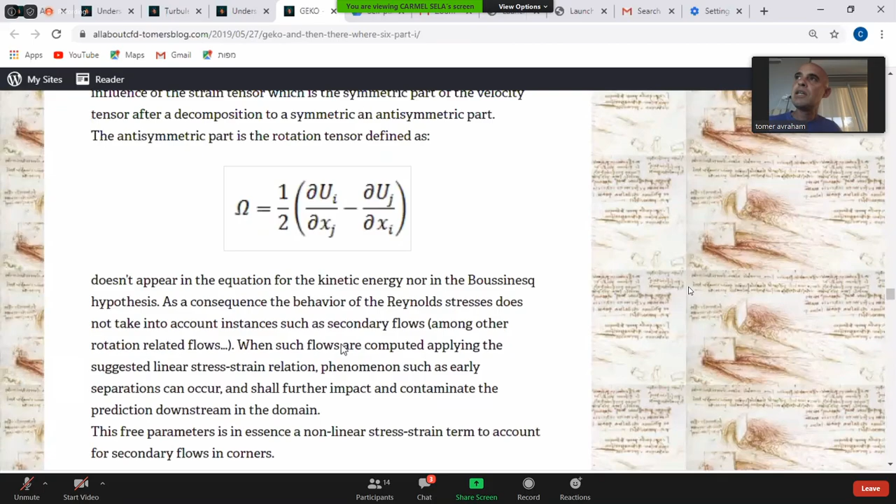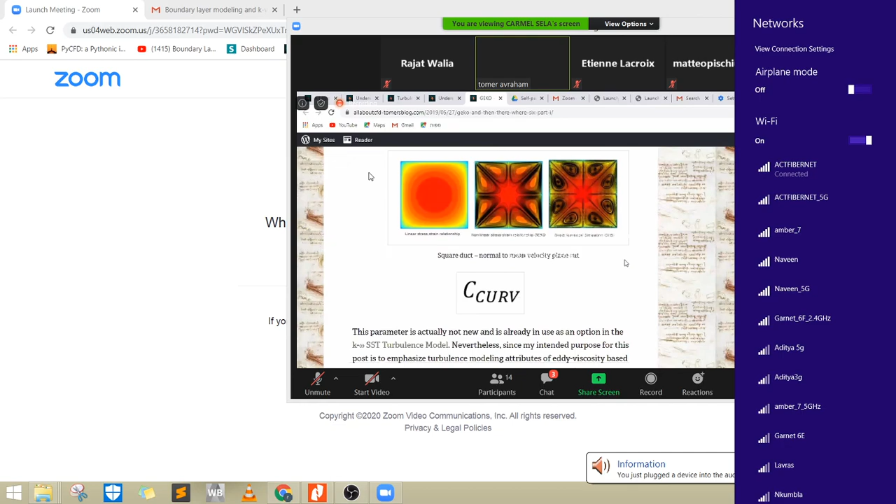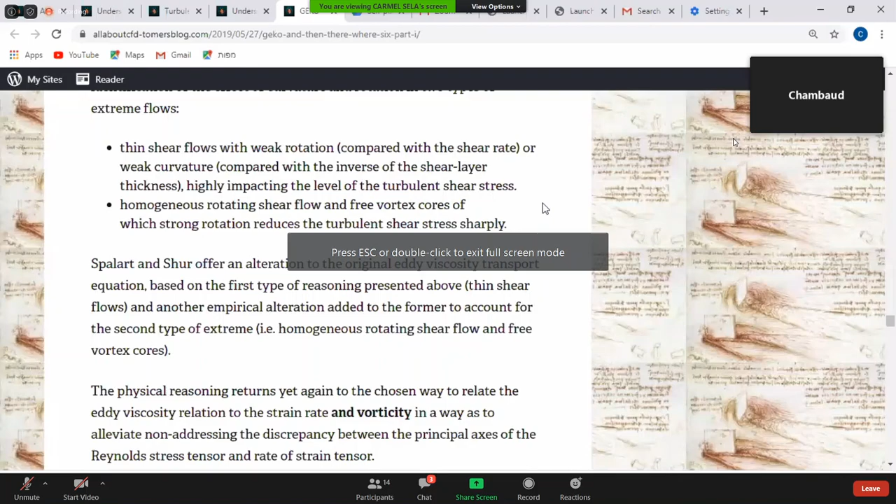So it's here, you can apply it in rotational flows. You can read that also in the Spalart-Allmaras post, it's the same issue exactly.

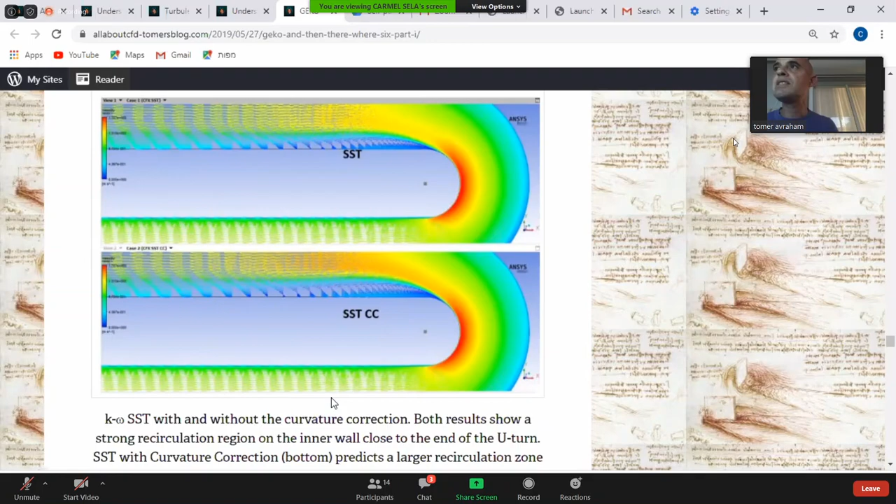Now I can show you the SST with a curvature correction and without a curvature correction. I talked about the U-bend before, and you can see there is a big difference between calculating with or without correction.

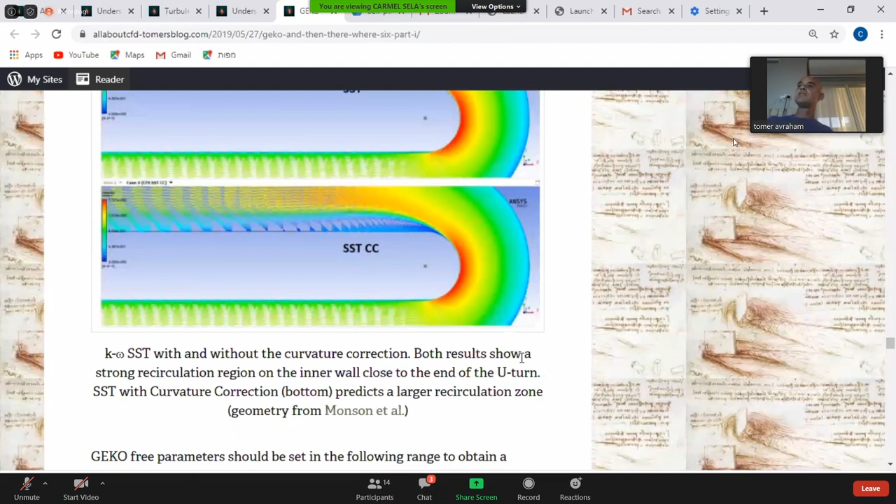Okay, now ANSYS has values which are recommended. Now the question must be asked: is someone willing to ask it, or will I ask by myself? What parameters do you prefer for each and every case? And the mental answer would probably be, if you do not know, do not touch them.

So what you have here is two options: the default, which is actually the K-omega SST, and another option, which is given by the guidance, there's a guidebook for the GEKO model. If someone wants it, he can contact me, I can send it to him. And actually, don't touch them if you don't know what you're doing. That's it.

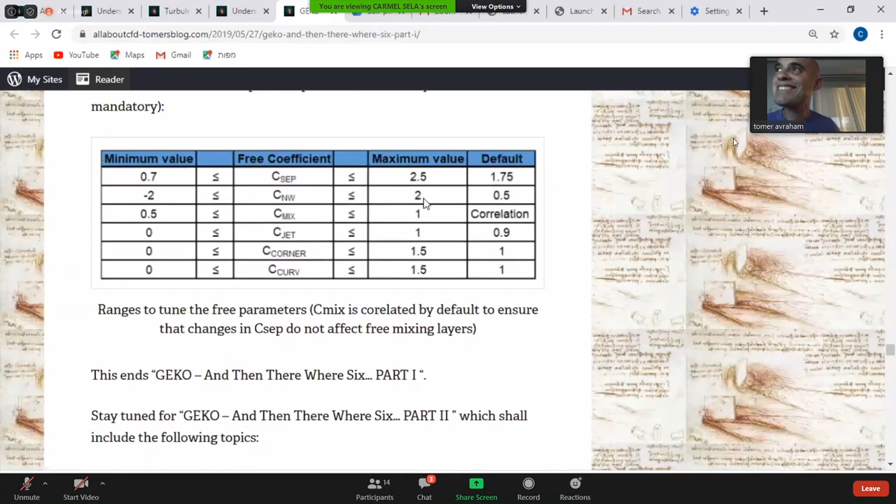So, any questions before we move on? I have a question, it's not really touching the last point that you touched, but if you have an SST simulation, steady state RANS simulation, and you see that the behavior of this simulation is oscillating - I mean, you quickly achieve average status, then start oscillating between values. So if you investigate the simulation, even if it's a steady state one, you can see some detachment that is something dynamical. What would you suggest to do in this case, when you see oscillating behavior in a steady state simulation?